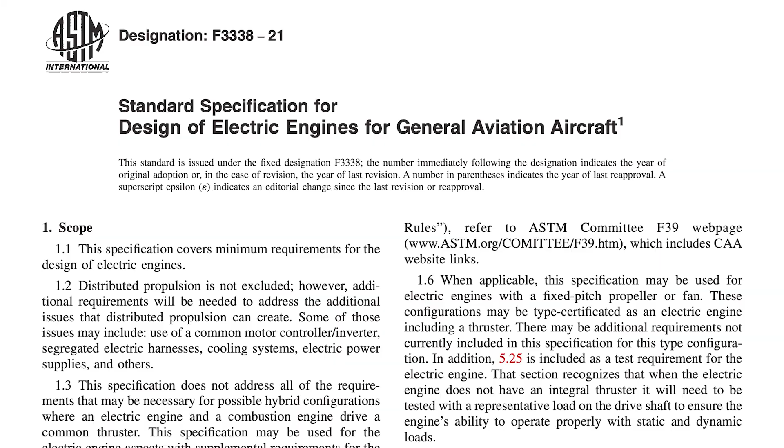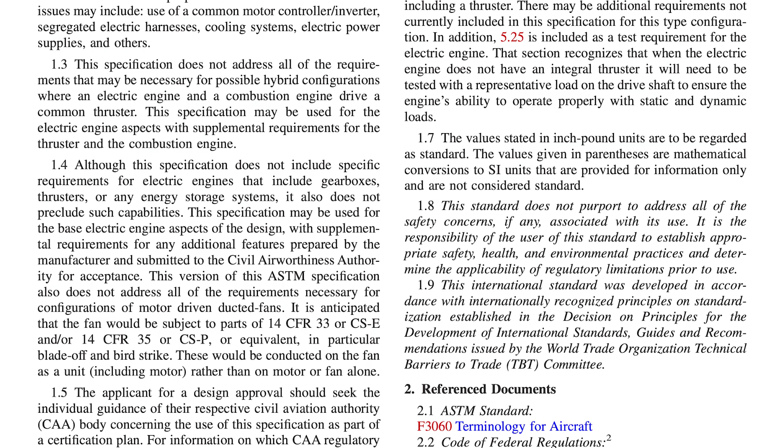Like typical ASTM standards, the first three sections of ASTM F3338, the standard specification for design of electric engines for general aviation aircraft, are always scope, reference documents, and terminology. Scope and reference documents have a list of standards and other documents that cover additional information on the topic. The terminology section contains terms and definitions.

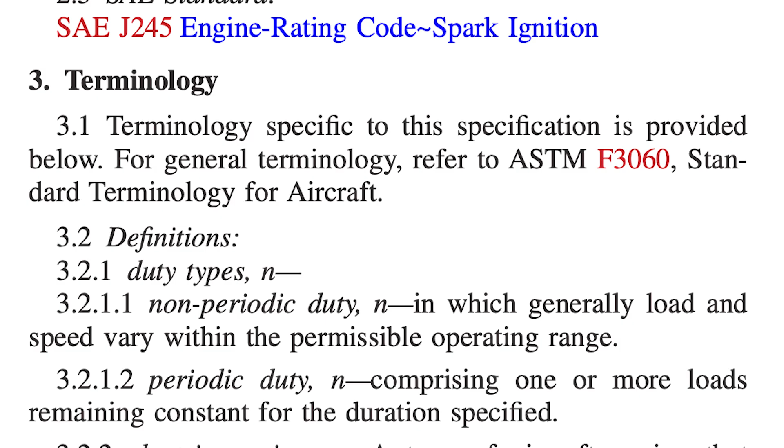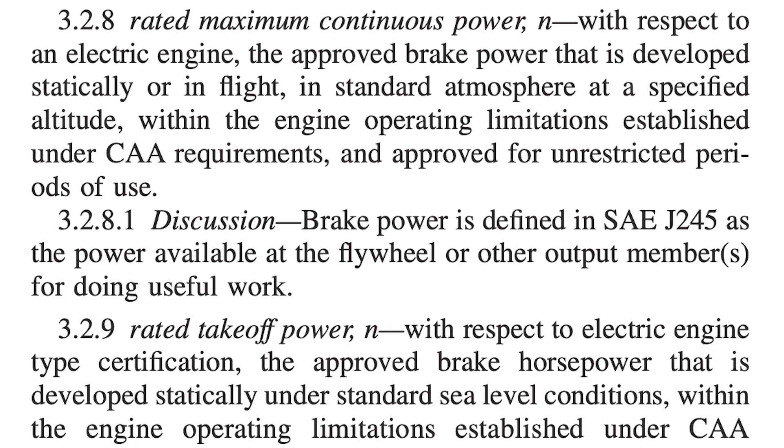It is important that all personnel in the aviation industry use a common meaning to foster teamwork and avoid confusion. This section is divided into 12 parts that identify terms and their meanings. It may include a discussion of some terms or additional information. The full standard for definitions related to airworthiness design standards is ASTM F3060, Standard Terminology for Aircraft.

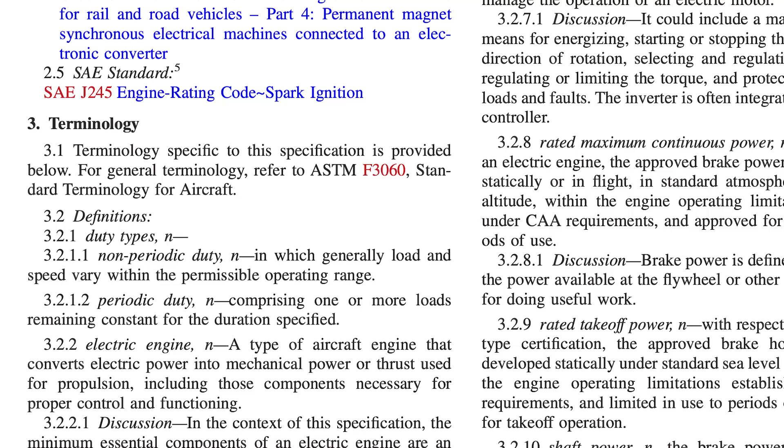The first two definitions we'll cover are electric engine and motor. This is to establish a common understanding of the terms and the difference between the two. An electric engine is a type of aircraft engine that converts electric power into mechanical power or thrust used for propulsion, including those components necessary for proper control and functioning.

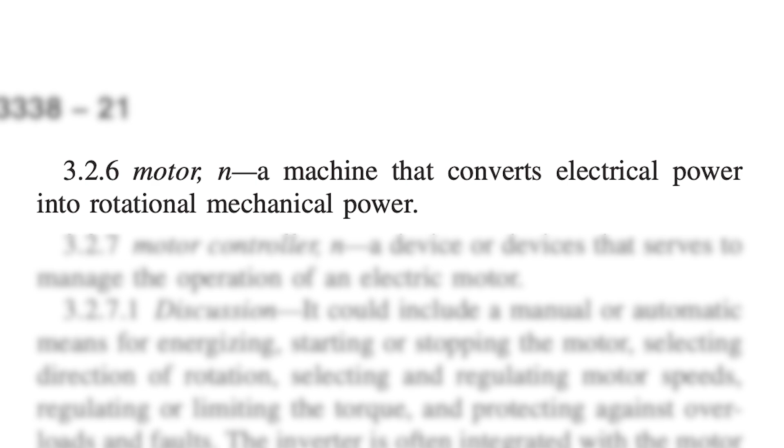A motor is a machine that converts electrical power into rotational mechanical power. An electric engine is used to provide propulsion to an aircraft, but a motor is any electrical machine that converts electricity to rotational power, such as motors for the extension and retraction of landing gear.

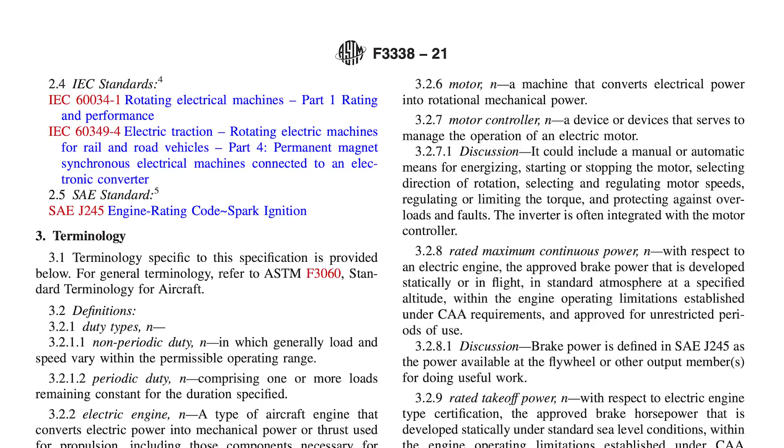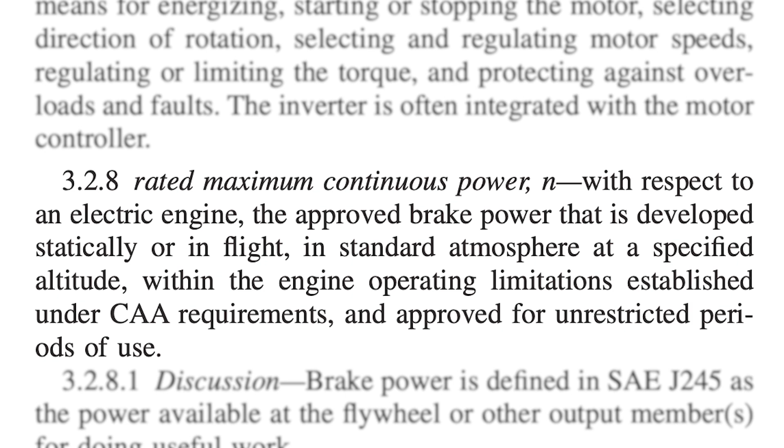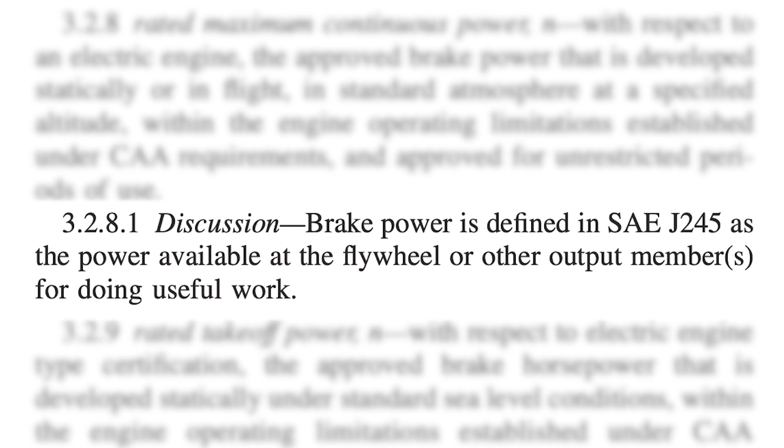ASTM F3338 defines two different types of rated power: rated maximum continuous power and rated takeoff power. Rated maximum continuous power is the brake power available at the output for unrestricted periods of use. Brake power is defined in SAE J245 as the power available at the flywheel or other output member or members for doing useful work. This is one example of the many times that this standard calls out other standards.

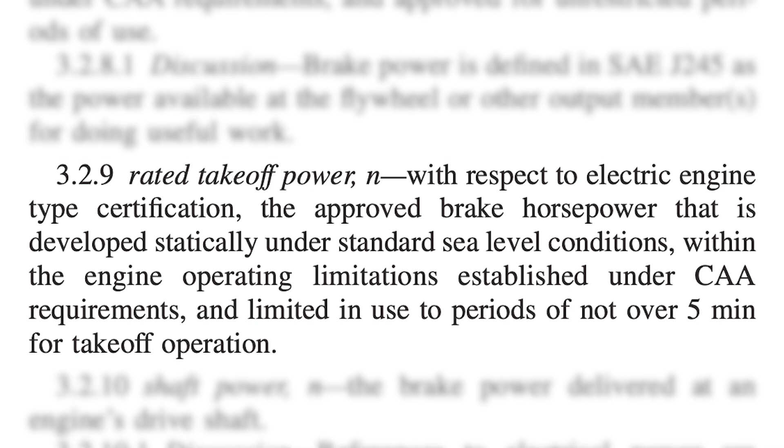Rated takeoff power is defined in ASTM F3338 as the power needed at takeoff limited to no more than 5 minutes. Next, we discuss the definitions for two different duty types. The difference in these terms is how the load behaves in the operating range versus the duration. These are foundational terms that establish design requirements that are critical throughout the design process.

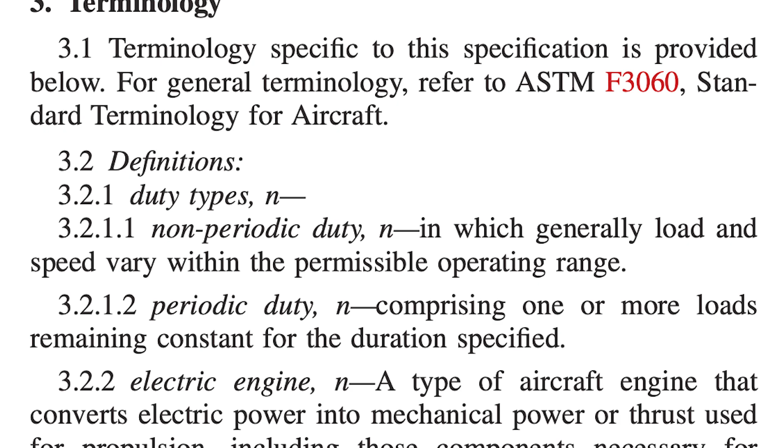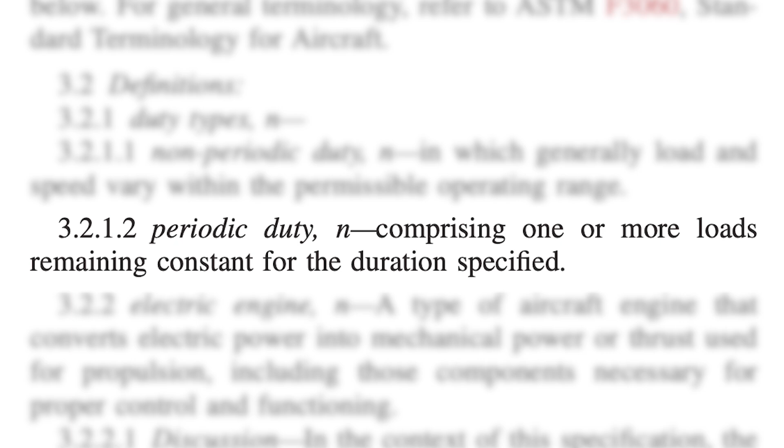The first term is non-periodic duty. This is when the load and speed vary while in the operating range. An example is the operation of a constant speed propeller that adjusts pitch during flight. The second term is periodic duty. This is when one or more loads are constant for a specified duration. De-icing boots on a propeller are an example of periodic duty, since they operate on a specific cycle that doesn't vary during operation.